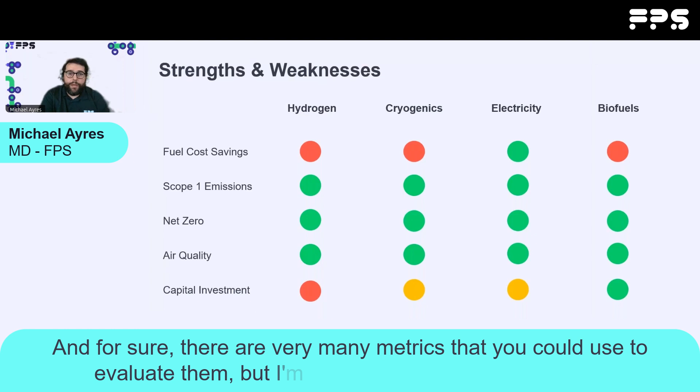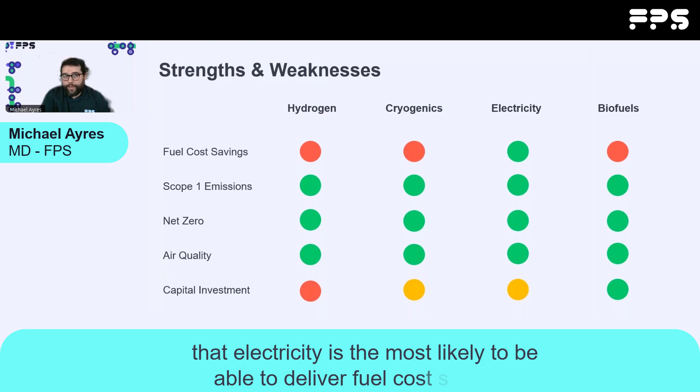So in terms of the capacity to deliver fuel cost savings, of all of those different options, electricity is the most likely to be able to deliver fuel cost savings. That's because the production efficiency of hydrogen and cryogenics is generally too low to be able to be substantially cheaper than diesel, and biofuels generally carry a cost premium, which is potentially likely to increase over time.

All of those technologies are capable of addressing scope 1 emissions and can be a really useful part of the journey to net zero for fleets. All of the technologies on that list also address air quality, though with biofuels it's slightly more of a grey area because there's some nuance to that position.

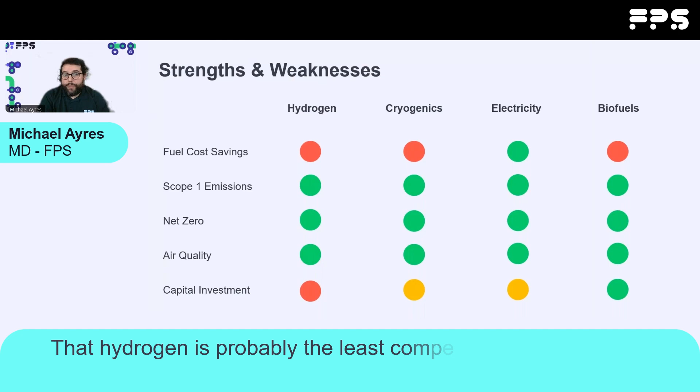You see real differential between the technologies in terms of capital investment. Hydrogen is probably the least competitive at the moment and is likely to remain so. That is to do with the increased costs of hydrogen containment and storage, because you require high pressure vessels, and also the high costs of hydrogen fuel cell technology, because it's typically produced in very low volumes and has a relatively high complexity compared to some of the other technologies considered there.

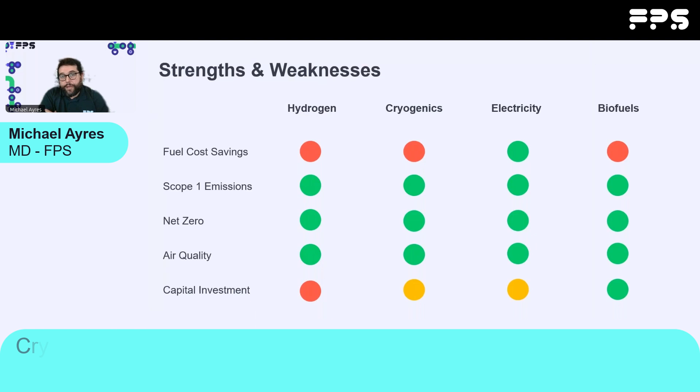Cryogenics and electricity are somewhere between where hydrogen is and diesel technology in terms of cost premium, and that's principally driven by volume. And then you have biofuels, which potentially could need almost no equipment in order to make them feasible.

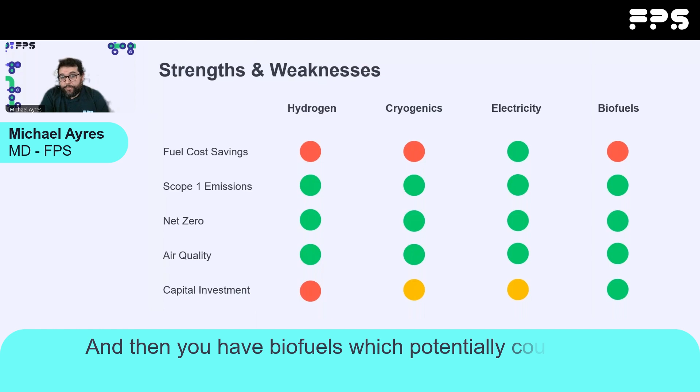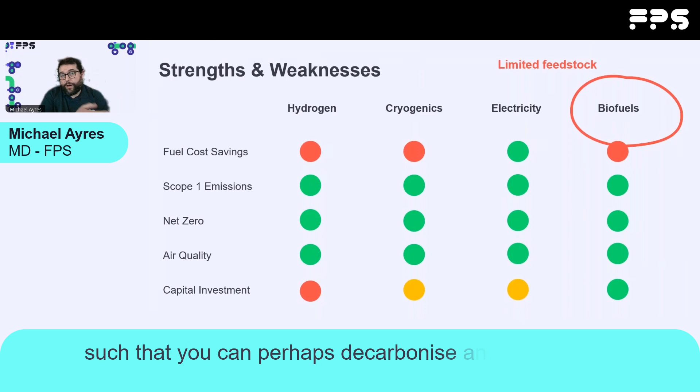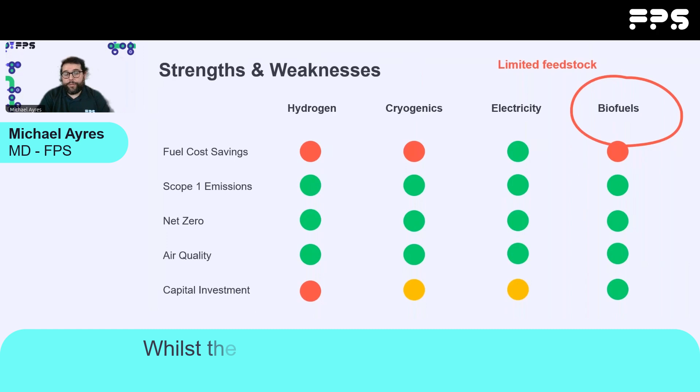It's probably worth flagging the reason why we can't simply adopt biofuels at this time, which is to do with the availability of feedstock. For sure, it's possible to get HVO in significant quantities, or biomethane, such that you can perhaps decarbonize an individual fleet. And many fleets are using this fuel at the moment as a really valuable part of their transition. And it bridges a gap in the short term, whilst the other technologies on that list are in the development phase.